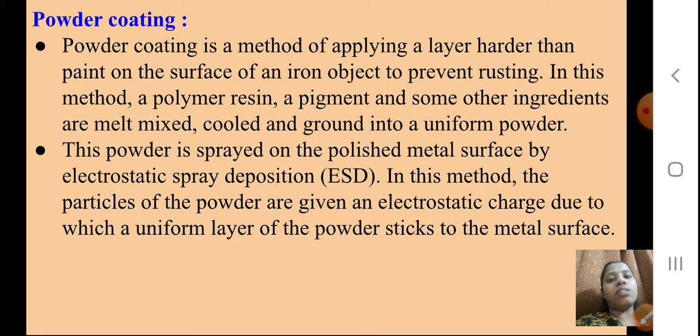Then the object is heated in the oven along with the coating of powder we have applied. A chemical reaction occurs in the layer, resulting in the formation of long cross-linked polymeric chains. So a polymer chain is formed which is cross-linked, linked together like this, because a chemical reaction occurs in the applied layer, leading to the formation of a polymeric chain.

This powder coating is highly durable, hard and attractive to look at. Powder coating can be done on plastic and medium density fiber, that is MDF board, in day-to-day use as well. So we can use this powder coating in day-to-day life, especially on plastic and on medium density fiber.

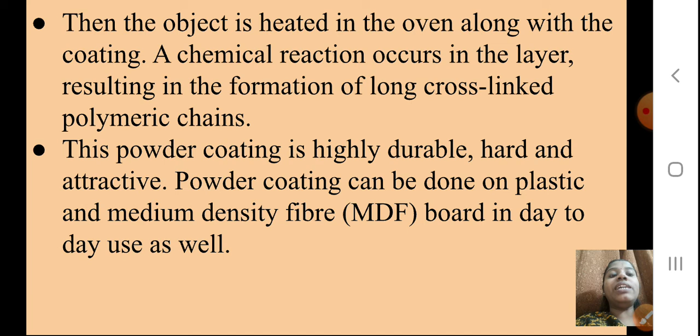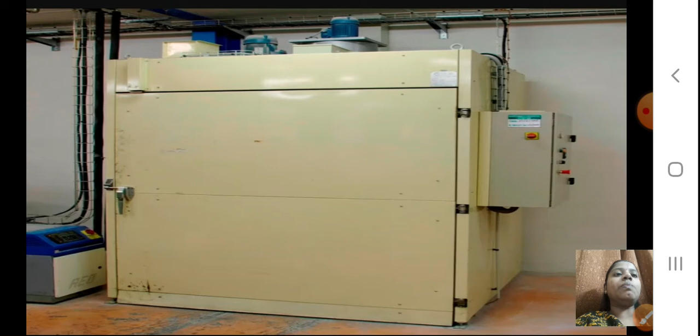Now next we are going to see anodizing. What is anodizing? A protective layer is formed naturally on the surface of aluminium metal by reaction with oxygen in air. In the anodizing process, this layer can be made of the desired thickness. Naturally it happens, but to increase the thickness of that layer, we can use this process of anodizing, students.

Anodizing is done by electrolysis. All of you know electrolysis of water, you have studied it. So like that, anodizing is an electrolysis process, meaning electrical connections are used, cathode and anode will be there. Dilute acid is taken in the electrolytic cell and the aluminium article is dipped in it, and it acts as the anode.

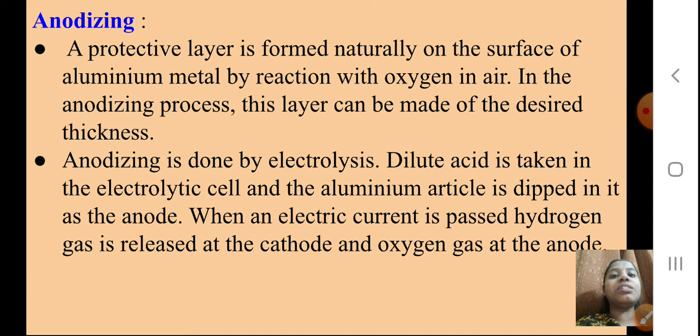When an electric current is passed, hydrogen gas is released at the cathode and oxygen gas will be released at the anode, okay students, after the current electricity is passed. So a reaction with oxygen occurs and a layer of hydrated aluminium oxide is formed on the anode. You know, the anode is your aluminium only, okay. On that, deposition of oxygen takes place.

So what is formed, students? A hydrated aluminium oxide is forming, okay. That is the iron article. So the reaction with oxygen occurs and a layer of hydrated aluminium oxide is formed on the anode, that is the iron article. This layer can be made attractive by adding colors in the cell during electrolysis.

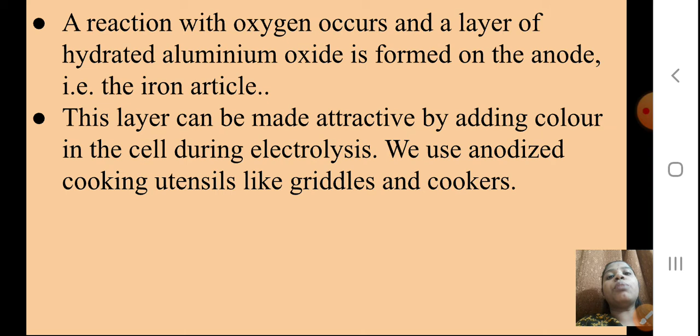So if I go on adding different colors to whatever article I want to get polished, what will happen? I don't polish it, I will say I apply the layer, and I'll get that colored layer, okay. We use anodized cooking utensils like griddles and cookers. So the different colorful griddles and cookers you see are nothing but the process of anodizing, okay students. I hope it is clear to you.

Okay, we'll proceed. Now the next part we are going to see, students, is ceramics. A ceramic is a heat resistant substance formed by kneading an inorganic substance in water and then shaping it and hardening it by heating. So what is ceramic, student? It is a heat resistant substance formed by kneading an inorganic substance in water, means a mixture of this, and then shaping it and then hardening it by heating it, okay.

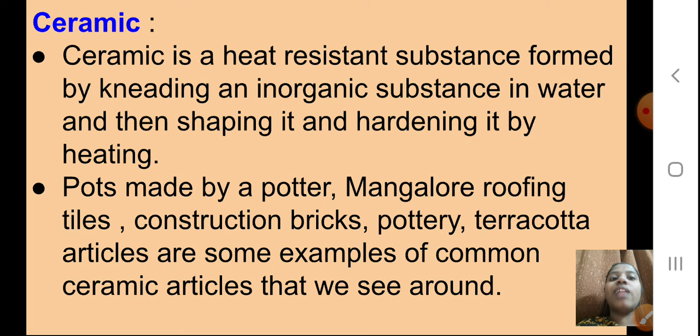Now, next we are seeing porcelain under ceramics. This is a hard, translucent and white colored ceramic. It is made by using the white clay called kaolin found in China. Glass, granite and the mineral feldspar are mixed with kaolin and kneaded with water. The resulting mixture is shaped and fired in a kiln at a temperature of 1200 to 1450 degrees Celsius. So this is the process, student. On firing again, after glazing, beautiful articles of porcelain are obtained.

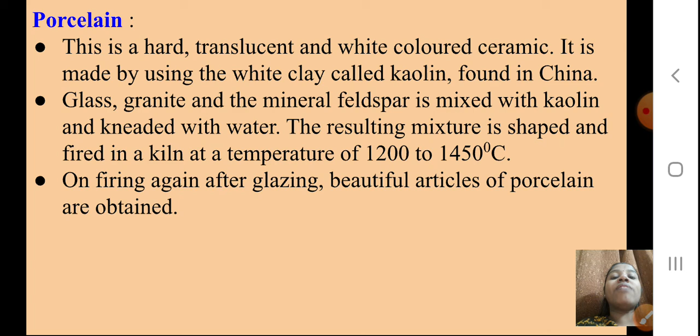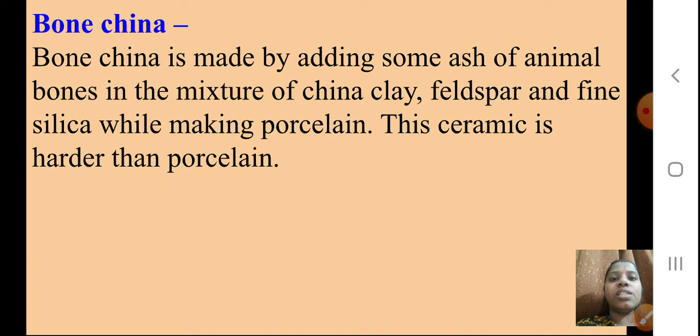Okay, we'll proceed. Now, bone china. Bone china is made by adding some ash of animal bones in the mixture of china clay, feldspar and fine silica while making porcelain. So while making the porcelain, if I add some ash of animal bone, it becomes bone china. This ceramic is harder than porcelain. If you see the hardness, bone china is harder compared to porcelain. Okay students, I hope it is clear till here.

So next we are seeing, students, advanced ceramics. Now what are advanced ceramics? Oxides like alumina, that is Al2O3, important to remember both, alumina and Al2O3. Zirconia, ZrO2, silica, SiO2, and some other compounds like silicon carbide, SiC. Si is the symbol for silicon, and carbide is C. Here carbon has become carbide, okay.

C we write for carbon, but here for silicon carbide the formula is SiC. Boron carbide, that is B4C, is used instead of clay for making advanced ceramics. So instead of clay, students, we can use all these compounds.

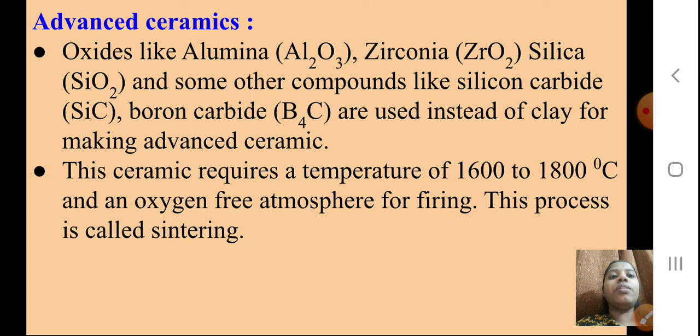Remember the process name. Now, ceramics can withstand high temperatures without decomposing, meaning without breaking down into their substances. It can withstand that much temperature. So ceramic is brittle, water resistant, and an electrical insulator. Important, students, it should not be an electrical conductor. So ceramic is brittle, it can break, but it is water resistant and it is an electrical insulator.

Therefore it is used in electrical instruments, for coating the interior of a kiln, and the outer surfaces of ships and blades of jet engines. So it is used in the kiln, the outer surfaces of ships and blades of jet engines. You will remember the uses of advanced ceramics here.

Then a certain type of ceramic tiles are fixed on the outer layer of a space shuttle. Some types of ceramics are used as superconductors. So certain types of ceramic tiles are used to make the outer layer of space shuttles, and some types of ceramics we are also using in superconductors, students. I hope this part on advanced ceramics is clear to you.

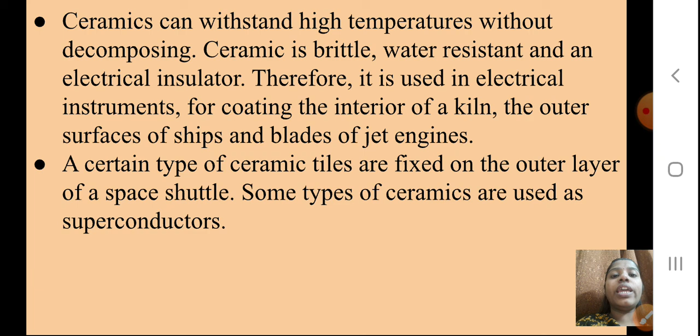So we have come to the end of today's presentation, students. Today we studied powder coating. We have seen the process, how the person was doing it, and we have seen a picture also. Then we have seen anodizing of aluminium, how hydrated aluminium oxide is formed, hydrogen gas is formed at the cathode, and the whole process. Anodizing is nothing but an electrolysis process. We are using electrolysis in anodizing.

Then we have seen ceramics. First we saw porcelain, the china dish you see day to day in the lab. So we are using porcelain. And then we have seen bone china. I have shown the picture; if you are using such plates at home, yes, it is bone china which we are using. And we saw

advanced ceramics. Instead of clay, we can use many of the silicon oxides and so on; you have many options. And only one thing: advanced ceramics are brittle, but they are water resistant. And next, they are bad conductors of electricity, so we are using them in electrical equipment.

So I hope whatever we did in today's presentation you have understood; you will go through it properly. Here we complete the lesson also, students. This is the last part of our lesson. I hope whatever we studied in this lesson you have seen. This is the 6th presentation, so I hope you have seen all 6 presentations, and whatever things I told you to make a note of, you will do it.